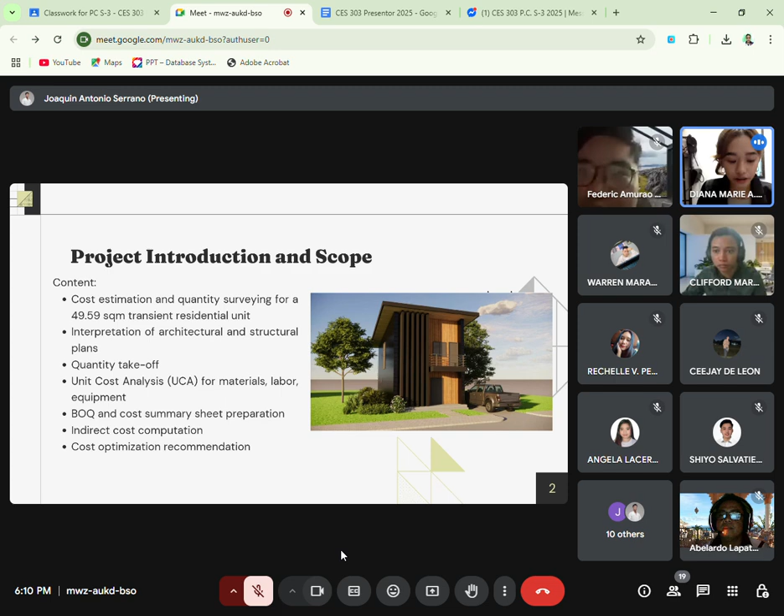So we started by interpreting architectural and structural plans, followed by a quantity takeoff to list some materials and work items. Then we conducted a unit cost analysis, or UCA, for materials, labor, and equipment.

From there, we presented the bill of quantities, also known as the BOQ, and cost summary sheet, including the indirect cost computation like overhead and contingency. Lastly, we provided cost optimization and recommendations to help reduce expenses without compromising quality.

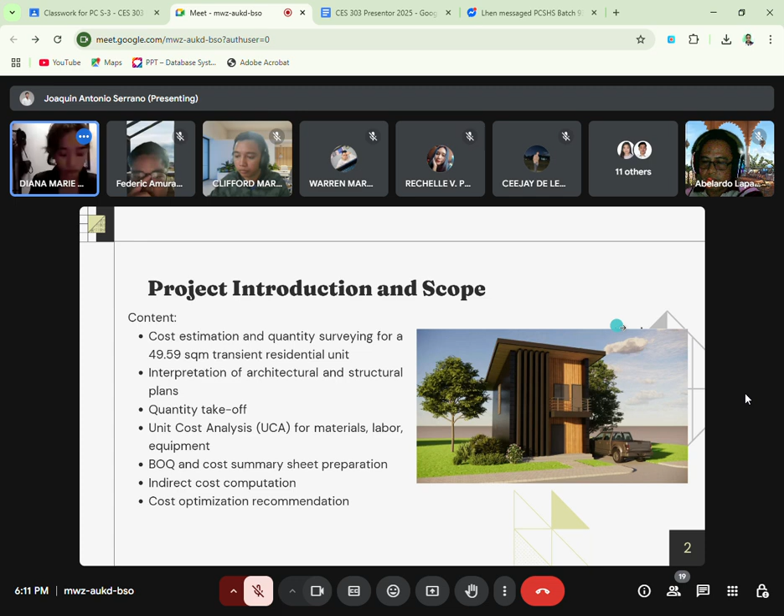So in this project, we analyzed the architectural and structural drawings to fully understand the design and technical requirements. We identified the key construction items, which include earthworks, concrete works, plumbing and sanitary works, masonry works, electrical works, and miscellaneous items like painting and finishing. This process ensures that we capture an accurate scope for cost estimation and planning.

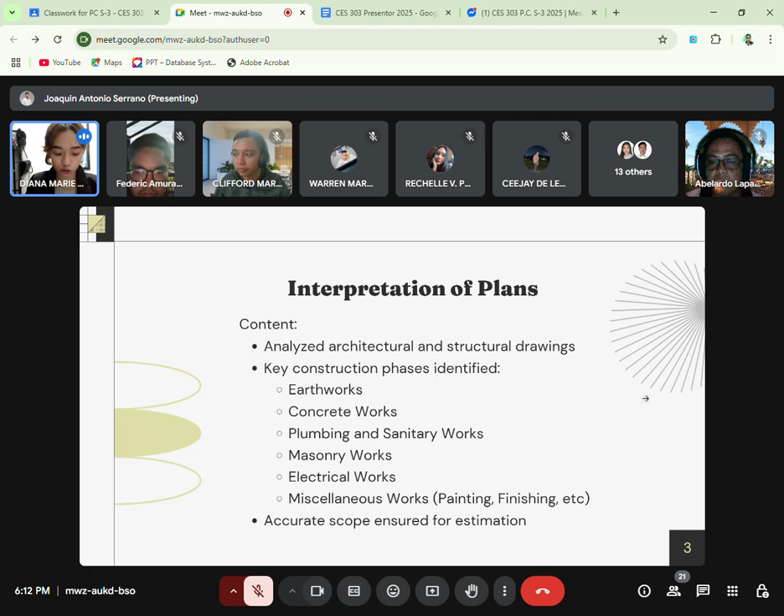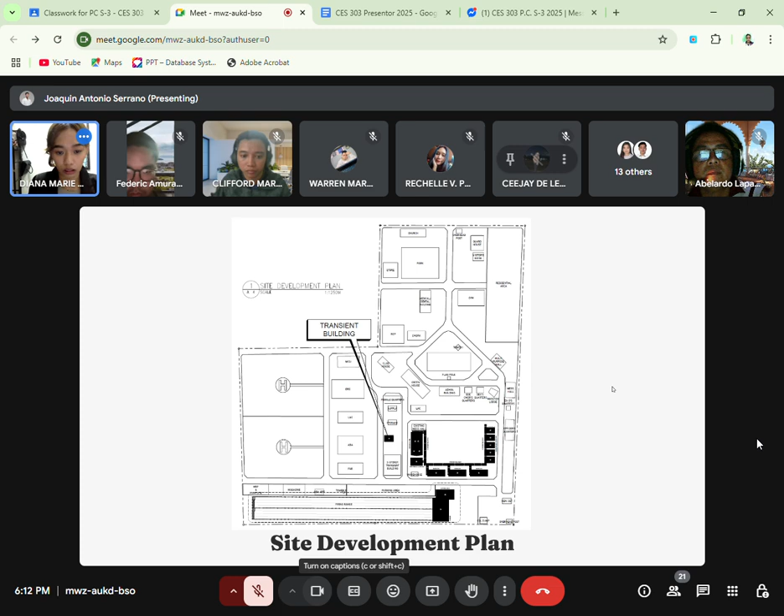In this slide, we can see the site development plan. We also have a floor plan of the ground floor - this is the ground floor on the left side, and on the right side is the second floor plan.

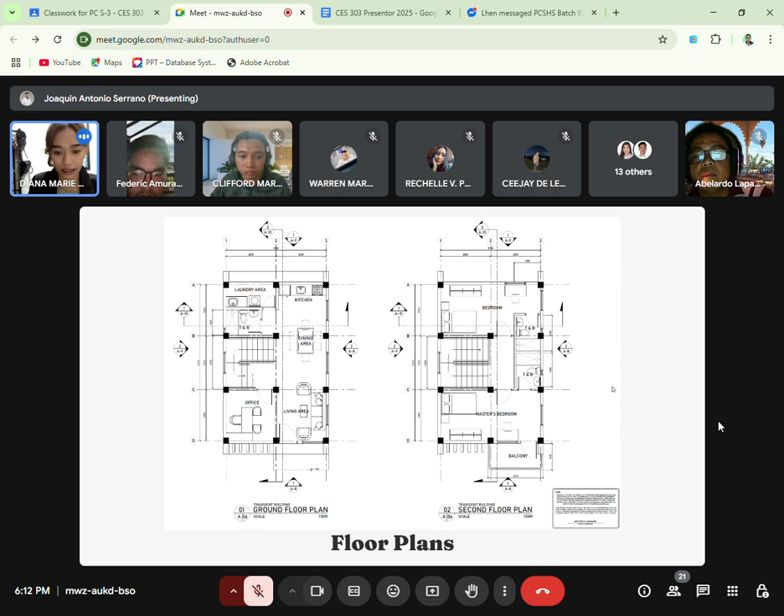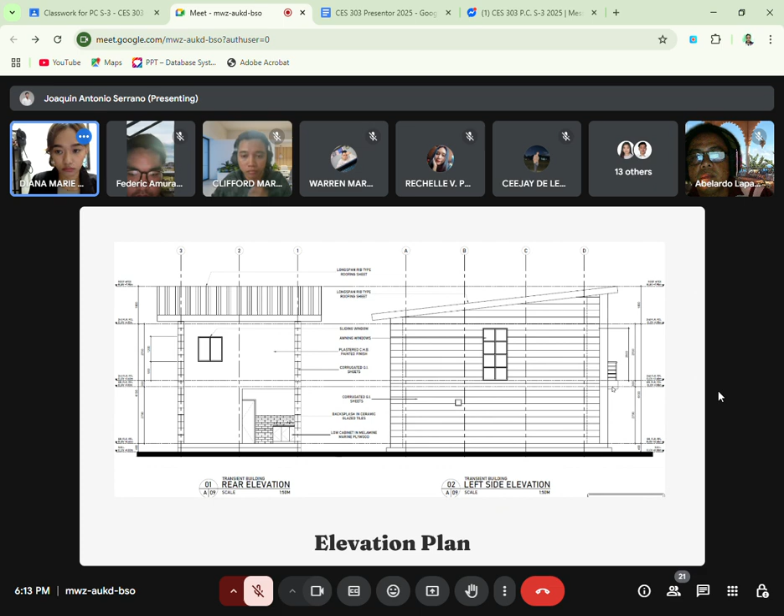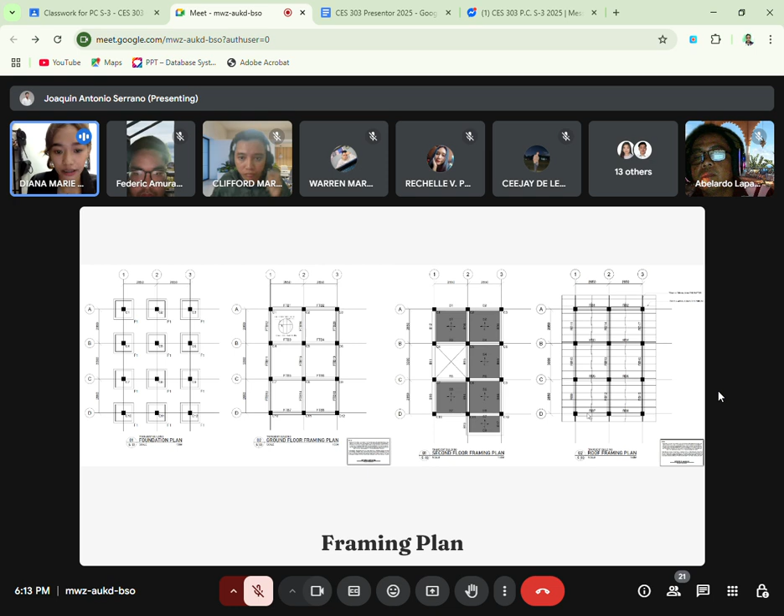Next, we will discuss this with my teammate.

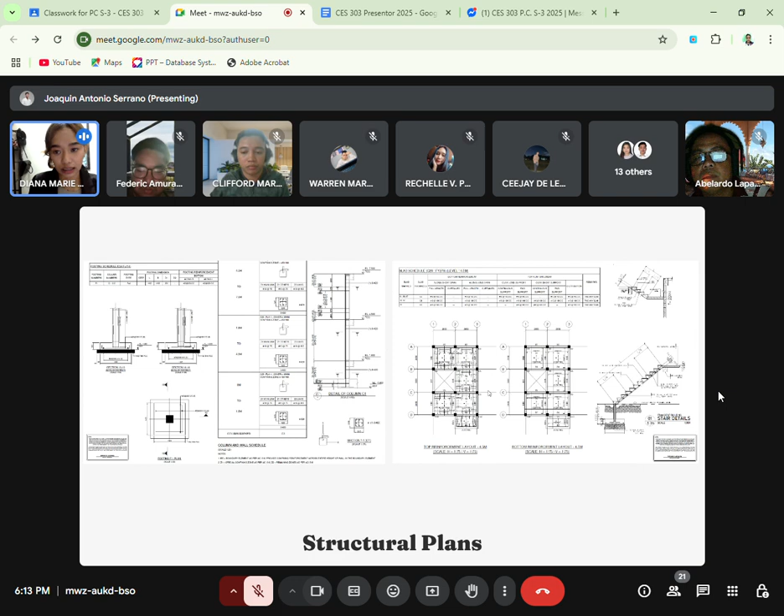For quantity takeoff, we did a manual takeoff using plan measurements for major items - concrete, steel, CHBs, plaster, paint - broken down by construction stage, and verified quantities for cost accuracy.

So here's our quantity takeoff. Per item, item 1A will be excavation under earthworks, with a quantity of 11.52 cubic meters. Next is embankment, which is 7.92 cubic meters, and gravel fill, which is 7.19 cubic meters. Next is for plain and reinforced concrete.

First, structural concrete, which is 3000 PSI Class A for 28 days, at 29.07 cubic meters. Reinforcing steel, grade 40, at 1,723.72 kilograms. Next, reinforcing steel, grade 60, at 2,399.19 kilograms. Next, forms and falsework, 34.32 square meters. And last, pre-stressed concrete floor joist, 117 linear meters.

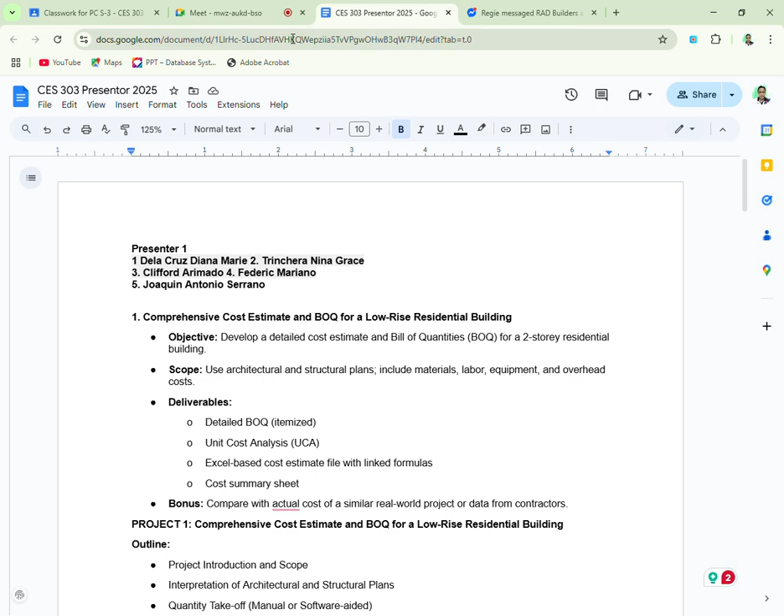Floor and wall finishes: glazed tiles and trims, 63.48 square meters. Unglazed tiles, 92.38 square meters. Cement plaster finish, 403.80 square meters. Painting works for masonry and concrete, 403.8 square meters. Next is painting works for steel, 142.8 square meters.

Masonry works: CHB non-load bearing, 72.51 square meters. CHB non-load bearing, 150 millimeter, is 131.3 square meters. Metalworks: structural steel, 300.74 kg, and railing, which is 1.

For the sample unit cost analysis, we only included the sample unit cost analysis for the excavation of common soil. This is only our UCA for the common soil, because there are many items discussed as per what Joaquin said - we have 68 quantities.

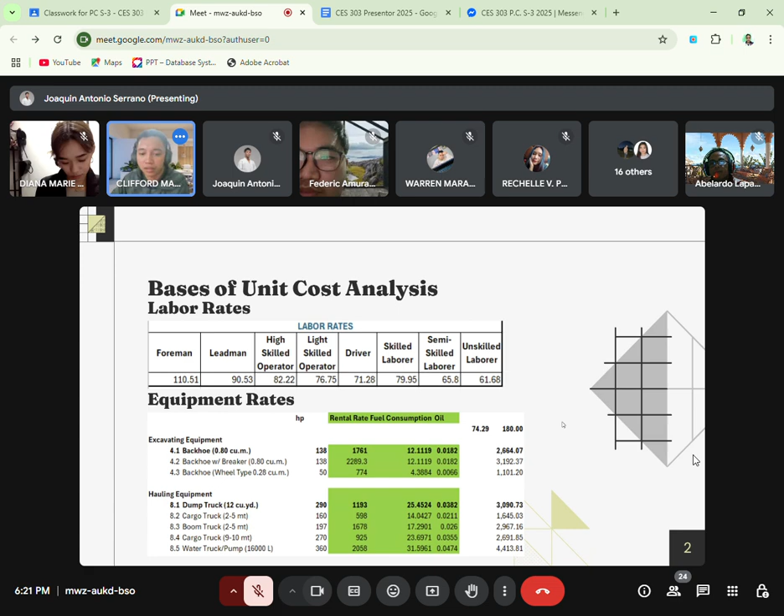Next is the cost computation. Some parts we won't spend too much time on. First we have the item, the description, the quantity of the item, its unit, the total direct cost, total markup, the 5% VAT, total indirect cost, total cost, and the unit cost. So first we have the earthworks.

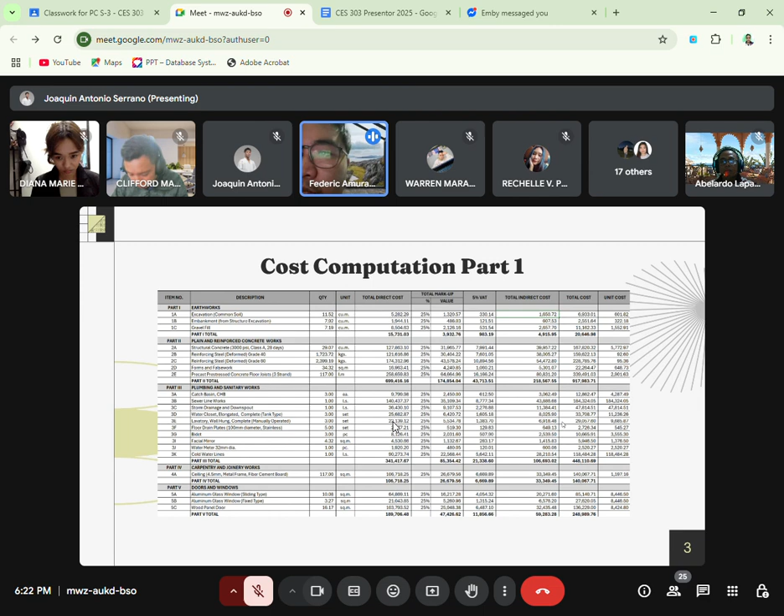For example, from the earthworks we have the excavation. For the quantity, we have 11.52 and its unit is cubic meter. The total direct cost for it is 5,288.99. For the markup, we have 25%, and the value is 1,320.

We added the 5%, and we get the total cost. From that, we have the total cost when we add the direct cost and indirect cost. Then when we divide it by its quantity, we get the unit cost.

It's the same for the next ones, which are the plain and reinforced concrete works, plumbing, and carpentry and joinery works, doors and windows. Next.

It's just a continuation of the cost computation, where we have the roofing works, floor and wall finish, painting works, masonry works, metal works, and electrical works.

For the total unit direct cost, we have 2,800,000. For the indirect cost, we have 878,894. And for the total cost, we have 3,691,000. Next, please.

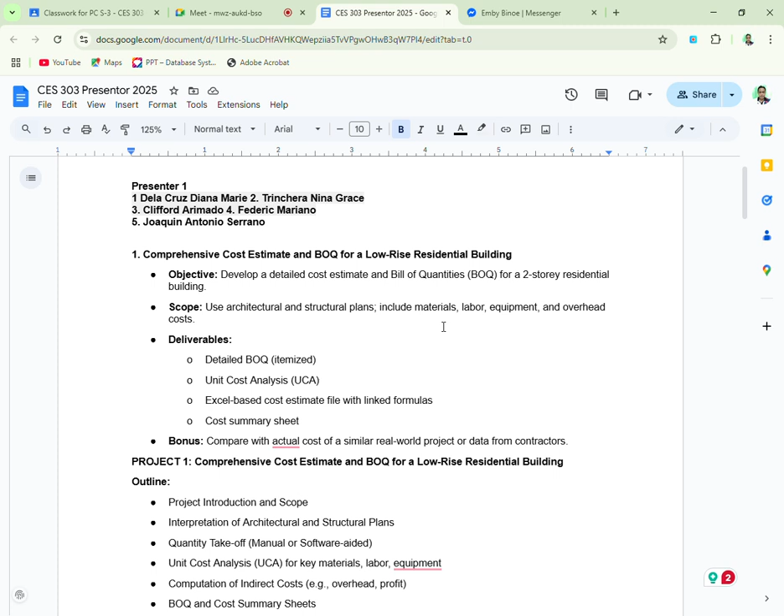For example, if we're going to do the roofing, the materials, even the screws, the scaffoldings, those are needed there. For this, in the BOQ, we place it like partitions. In total, we have 11 partitions as we can see.

But mostly, once we're already in the cost computation, there tends to be maybe one more, like part 12, where we place the contingency and also the profit of the construction project.

In this one, what we did is somewhat like a lecture where we also show our markup price. That's why there's the total markup value and then the VAT of 5% also.

So we just separated the indirect and the direct costing. But in terms of proposals in the field of industry, usually that also gets hidden, it goes into the additional part of the quotation.

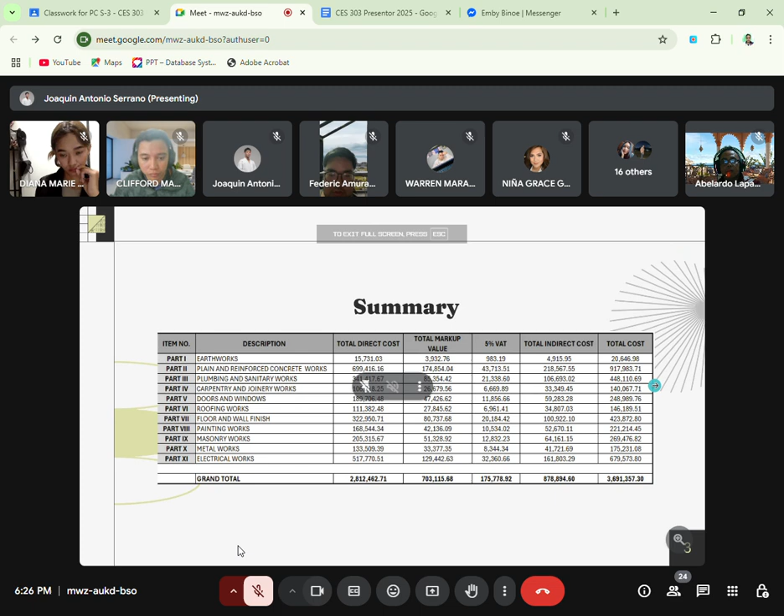Also, to give you the conclusion, a detailed cost plan enhances and controls the budgeting. So it's very important for us to be detailed in terms of this. Of course, this will avoid shortages in budget, and also help the flow of scheduling.